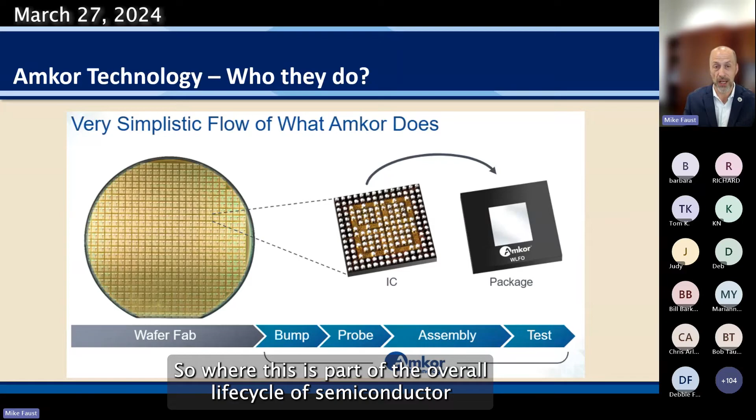Those are very, very different processes. What actually happens in the Amkor process: their base product is that wafer with all those small little chips. They're going to cut those chips off, then do a series of subsequent processes where they package and assemble semiconductors and microelectronics, conduct that assembly process, and then ultimate testing. So this is part of the overall life cycle of a semiconductor manufacturing process, but it is very, very different than the wafer fabs that are Intel and TSMC.

So that gives you some context of where this is. The property is located off of El Mirage. It's about 3/8 of a mile from any of the single family homes that are currently existing. And so that's where it's located.

We've heard a lot of folks say, well, this is displacing, or we will no longer see the planned retail. That's not an accurate statement. This is in the employment section of the 5 North at Vistancia, and I'll touch a little bit on the zoning for this particular area.

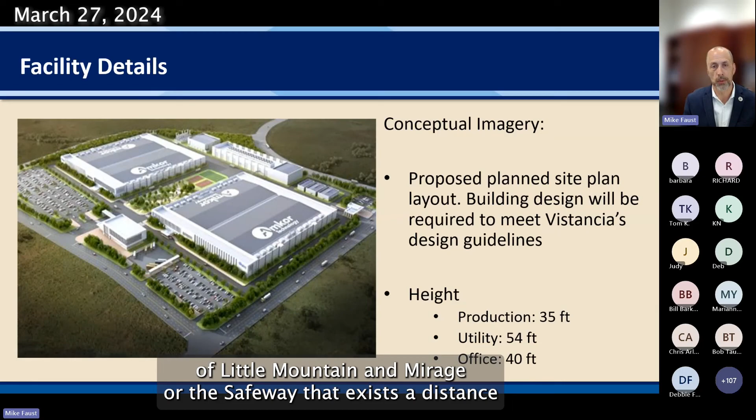To put that in perspective, the Fry's being constructed up on the corner of Lone Mountain and El Mirage, or the Safeway that exists at Vistancia and El Mirage - those buildings are about 35 feet tall. So to put it in broader context, from a height standpoint, the production building should match that look, feel, and size of those properties north and south.

I will note there is an office building located on the property that's intended to be a touch taller - that's currently projected at about 40 feet tall. And the tallest building on site is currently projected at 54 feet tall. To put that in perspective, the Vista Winds property, southwest corner of Vistancia and El Mirage, that building is 60 feet tall. So just to give some point of comparison, you've got buildings out there that are taller than these ones, and these ones are designed to fit the look and feel of the community.

So we've got a couple other questions. Will the landscape fit the look and feel of the area? And the answer to that is yes. The same landscape planning and approvals have to go through the Vistancia Design Committee.

We've had some questions about what type of additional outreach or communication there will be with this project. Specifically, the site plan review process requires public outreach. So as the site plan comes in and it's being reviewed, there is a public notification that goes out to inform people so we can share with you where we are in the process, but more importantly, what the latest look and feel of the buildings are and what that site looks like.

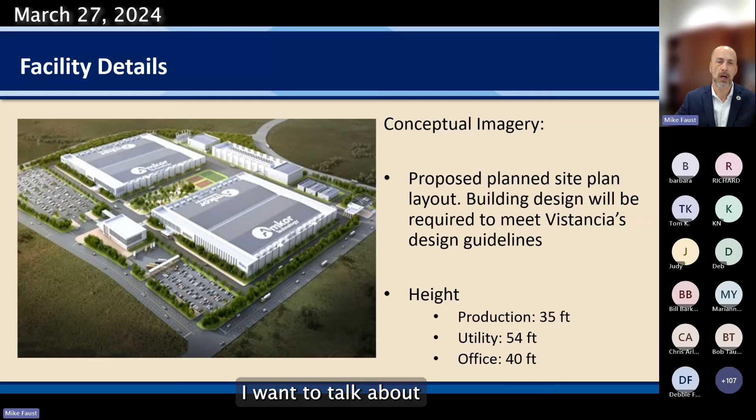I want to shift now from the site. So we talked about where the building is, to a little more detail on the site. I want to talk about some of the environmental and utility questions that we've received.

There have been a handful of questions, and I can tell you, having worked intimately on this project for the better part of 8 months, a lot of energy and effort has gone into this aspect of the project because of the importance of environmental concerns and water security.

First and foremost, I'll highlight that this facility, by our agreement, must run on reclaimed wastewater. That means water that comes through the sewer is treated at the wastewater treatment plant, then put out as reclaimed water, which is non-drinkable, and will be utilized for this production. That is a very wise use of that water resource.

Secondly, we've gotten some questions around the water demands. The facility will utilize, in each phase of the project, 200,000 net gallons per day. I want to be specific about what that means. For each phase, it will utilize 1 million gallons of water per day, which sounds significant, and it is.

The key to that, though, is we get 80% return from the facility, and that 80% is then cleaned and put back into the recycled loop. So when you have 1 million gallons going into production, with 80% returned, cleaned, and put back into the system, you have a net effect of 200,000 gallons a day.

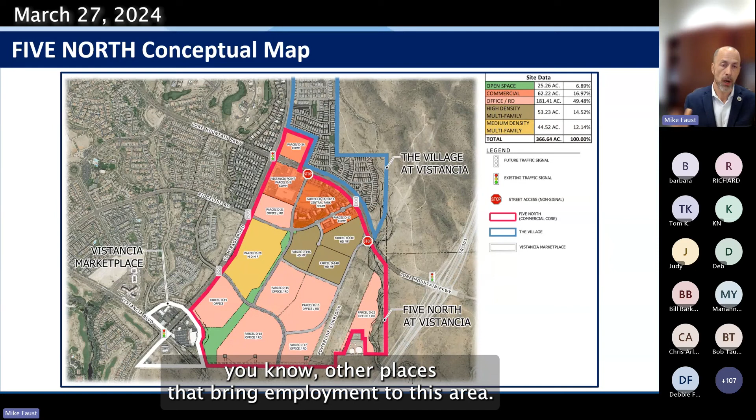You'll notice there's some peach color directly below that - that's intended for employment use as well, office and other places that bring employment to this area. As we move north into the project site, you see the three brown square parcels. Those are multifamily units, planned to be the apartments that you heard so much about last summer, and that's where they'll be located.

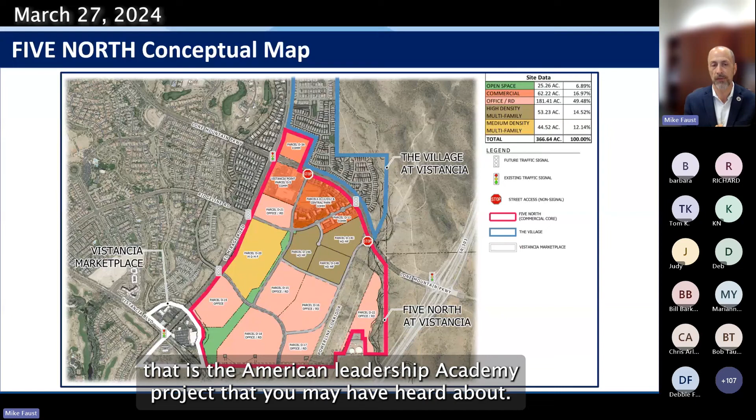If we transition west into the yellow area, this is also multifamily, but less dense, meaning fewer units per acre than in the brown. If you transition south of the yellow into the other peach and green, that is the American Leadership Academy project you may have heard about - a public charter K through 12, which I'll highlight in a few minutes on another slide.

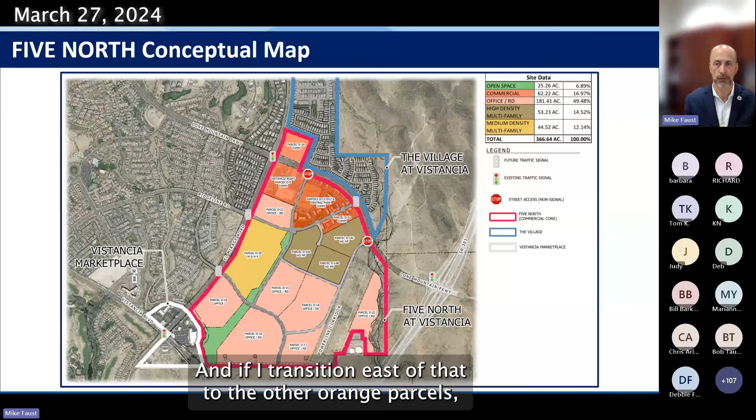As we move to the north end of the project site, you see the orange. In the left corner, the hard corner of El Mirage and Lone Mountain Parkway, is the Fry's Shopping Center currently being constructed. Transitioning east of that to the other orange parcels is the upscale amenity area that so many people have expressed desire for.

So highlight a couple of things. The first and most important thing is that the Amkor project site, if anything, enables and helps this come to fruition. It doesn't prohibit it.

I've seen communication, I've seen questions that say, now we're not getting what we were promised as a community. In all reality, the Amkor project and employment centers at 5 North at Vistancia help enable the restaurants to come, because what we see in the restaurant business is that one meal alone is not enough to open a business. They really have to have lunch and dinner, breakfast and lunch. They need to be able to get 2 or 3 turns on those tables in order to make enough revenue to make those businesses successful.

So we see this employment play in the 5 North at Vistancia as an enabler to help this happen.

Now, some folks have said, hey, could you share with us the names and the timing? And the answer is not yet. I just had a conversation with the developer the other day. The project is still intended to move forward. They're working diligently to make it happen, they're excited to deliver the vision in which they've constructed it. It's a fantastic vision. The city is looking for opportunities on how we can come in and help partner and enable it to make it happen sooner. But for where they are right now, it's premature for them to communicate any specifics or give an exact timeline. But we're hopeful that happens sooner rather than later, and bringing the density through employment and the multifamily apartments is just part of activating and making that happen.

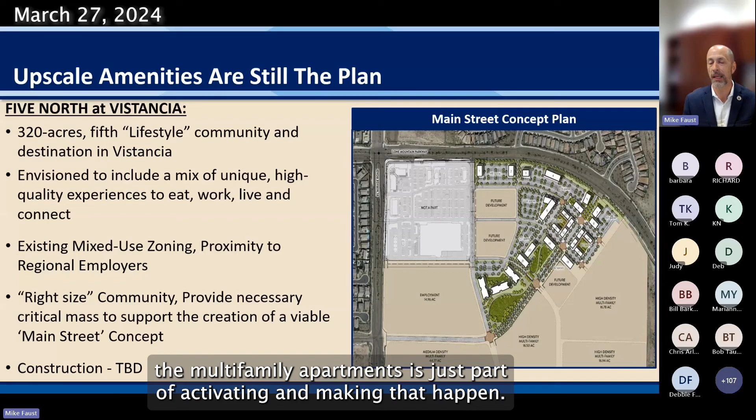I want to touch on briefly, because a lot of folks have asked questions about the American Leadership Academy. Where the high-end retail is located on the north end of 5 North of Vistancia, American Leadership Academy is located in the southwest corner of that.

I want to start with just a couple of questions that we've gotten, and I'm not going to go into full detail on the full execution of this project. I think it would be great to come back and maybe do another one of these specifically on this project, because I think it's such a fantastic thing. But I want to touch on a couple of key components.

The first of which, because there's some confusion about the city's role with planning schools: at the end of the day, the city really doesn't have a role to play inside of the broader unified school district and their construction and operation of schools. In this particular area, it's Peoria Unified School District that has that responsibility. But we want to be good partners in that. We want to continue to bring forth projects and solutions to help them, whether that's planning for land or just helping those projects advance.

This particular parcel of land was always contemplated for a school. Although the original intention and hope was a Peoria Unified School District high school, for a multitude of reasons that we won't get into here, that just hasn't happened. So we were excited when American Leadership Academy came to the table with a public charter school, a K through 12 option for offering families of Vistancia an alternative. They're targeting 2,400 students there, with 1,200 of those in the high school.

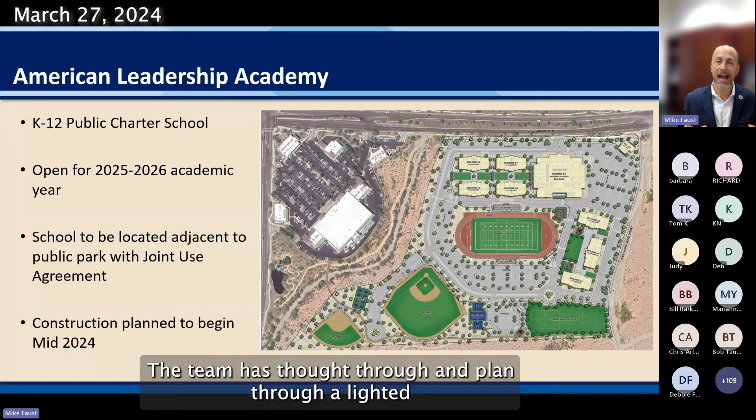I'll touch on all of this in a later slide. The goal is to stagger this: the school would be done in summer of '25, the park would be done in summer of '26. The team has also planned a lighted pickleball court built into the concept. We don't have the construction timeline for that yet, but it is built in. So we're bringing new amenities to the community through this special use park.

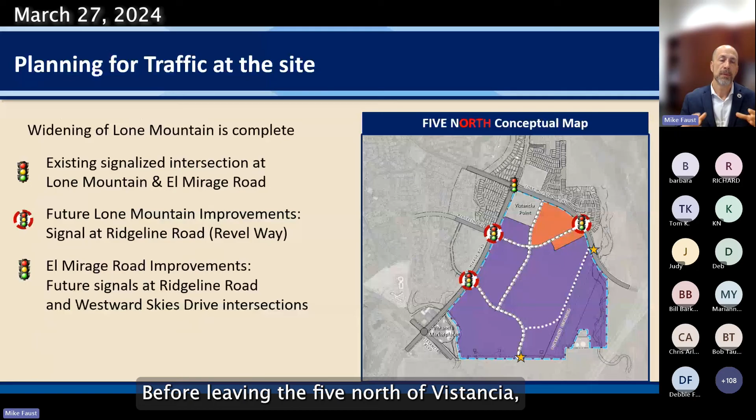Before leaving the 5 North at Vistancia, I wanted to touch on traffic, because a handful of people have asked questions about traffic planning and what we've done to think about it. So I'm going to touch on traffic as it relates to 5 North, and then in the next slide I'll zoom out and discuss traffic from the broader Northwest Peoria area. First, let's touch on this.

Each of these dotted lines is a conceptual alignment for a roadway. Now it's more than conceptual—these plans have all been submitted to the city, the majority are already approved, and now the developer is working on the construction timeline.

Before I get into all the roadways, I'll touch on the first one. If you look at the southwest corner on El Mirage, you see two stoplights with red circles around them. Those circles indicate a planned signal that's not yet constructed. In conjunction with construction of the ALA campus, you'll have what's called Westward Skies, the road just north of the K through 12. That signal is currently being designed and will be constructed and in operation prior to the school opening.

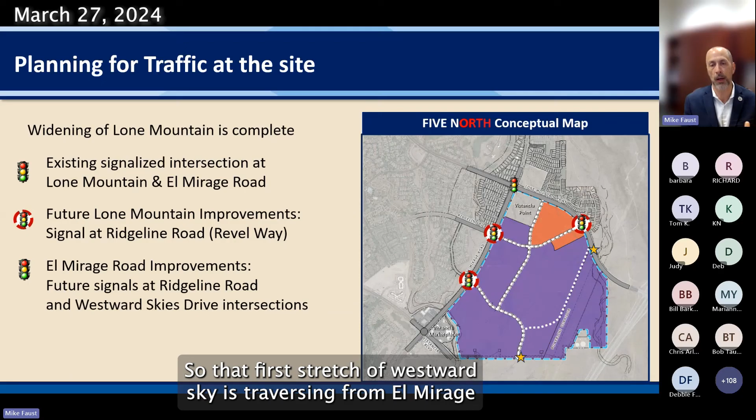The team's been working diligently to make sure this happens—it's critical, and we're watching it closely. That first stretch of Westward Skies, traversing from El Mirage east, will be constructed along with the high school. The rest of the roadways will come online as the projects build out. As Amkor builds out, its roadway system will be built, and as other pieces of property build out, those roadways will be built as well.

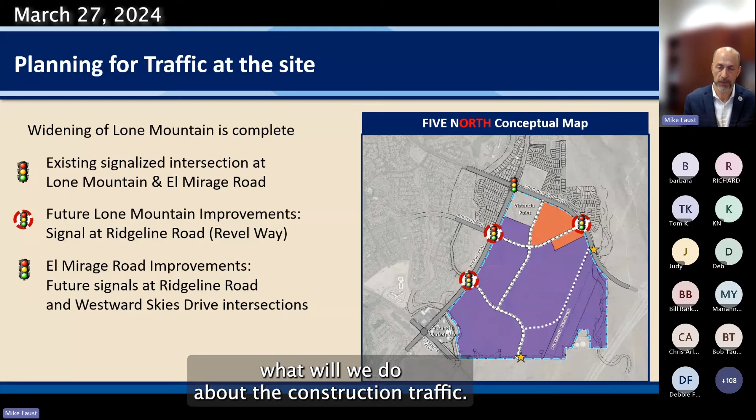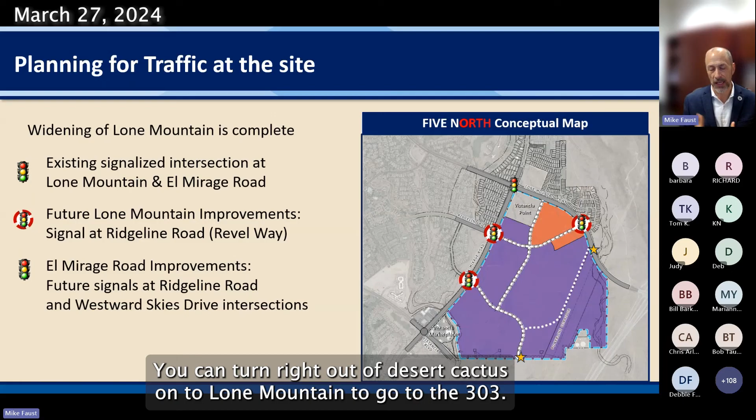Before I touch on traffic generated by Amkor, I want to address construction traffic, since we've gotten a lot of questions about that. There are two yellow stars on this exhibit. The one on the north end, the roadway attaching to Lone Mountain, is called Desert Cactus. That road is planned to be the primary source of construction traffic. It's currently built out for three-quarter access, meaning you can turn right off Lone Mountain into the property, turn left off Lone Mountain onto the property, and turn right out of Desert Cactus onto Lone Mountain to reach the 303.

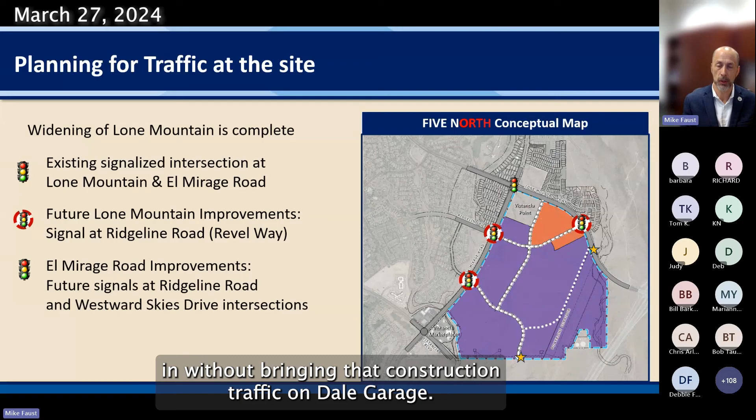We see this as the best and most viable pathway to bring construction traffic in without putting it onto El Mirage. There's a lot of planning that has to go into that, and I'm not saying there will never be any construction traffic on El Mirage, but a lot of thought is being put into moving traffic in the area without burdening the community.

Second, the star at the bottom of the image: Westward Skies is planned to go from El Mirage past the K through 12, wrap around, and turn south. Right where that star exists, due south of it is Arizona State Land. We've approached the State Land Trust and State Land Department asking permission to construct that road early—a connection off Vistancia Boulevard into this site. We believe that returns value to their property.

That sits due south of 5 North at Vistancia. But we believe that also returns value for this overall project site by directing traffic away from the Vistancia El Mirage interchange and allowing people to get to 5 North without having to go through that intersection.

Again, those are the plans, those are the discussions. I've learned a lot since being at the city, and one of the things I've learned is the amount of attention to detail and planning that goes into our transit system. We have thought through and contemplated roads decades into the future, but when it's time to construct, it does take several years to conceptually lay it out, to buy the property, to then construct. A lot of work remains to be done, but we're hopeful we can find alignment with Arizona State Land to construct that road early.

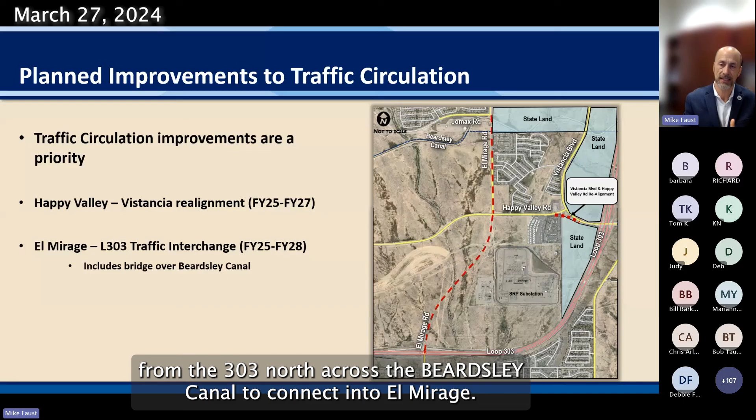I want to highlight two very specific projects for you. The first project is the El Mirage Traffic Interchange from the 303 north across the Beardsley Canal to connect into El Mirage that currently dead ends at the Jomax alignment. I'm excited to announce that ADOT did a kickoff for the design concept report for that project just this week. The city hosted it here on site. This road is very important for two primary reasons.

Number one, it adds a third access point to the community because we have Lone Mountain, which is an access point. We actually have, it'll be a fourth. We've got Lone Mountain, we've got Jomax, we've got Happy Valley that transitions in, but then bringing in El Mirage offers a fourth entryway into the community. So that's huge from that standpoint.

Number two, it provides a lending hand to Surprise because we find people have to traverse through our city to get to the northern parts of Surprise, and building out El Mirage allows people to exit the 303, get to Happy Valley Road and transition west into Surprise without clogging up the Vistancia Happy Valley intersection.

It is important to note where we have launched the design concept report for this. This is a federally funded project. It is a big project. It will take time, but the fact that it is started and it is no longer conjecture, it is actual forward action, is a very positive thing.

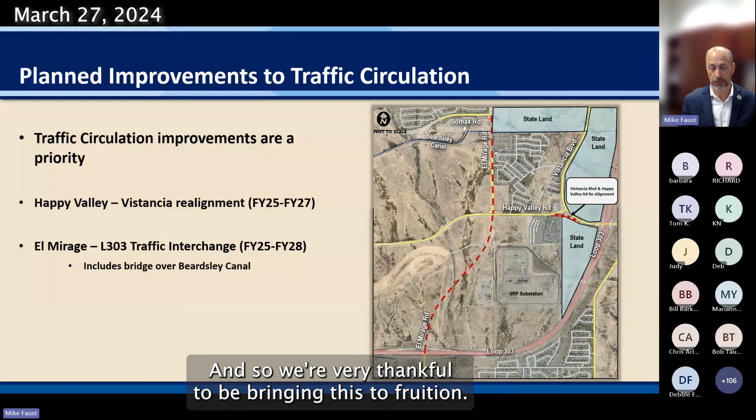We just talked to them as early as Monday about building temporary roadway to allow through traffic while we reconstruct the intersection. A lot of details to go there, but we're very excited about this project. A lot of forethought, a lot of planning has gone into it. We're very thankful to be bringing this to fruition.

I just want to step out one last time before we end our time together and talk about next steps. From a macro level schedule standpoint, we've touched on each of these, but I'll just drill them back home.

July 2024, we're expecting the American Leadership Academy to break ground, so construction will get started in the area. We expect the roadway north of it and the signal will get constructed. So by June of 25, when that opens for an August 25 launch of the school year, that roadway, that signal, that campus is all in place.

Looking forward a few months from there, September of 2025 is where Amkor, by their agreements with us, must break ground. They can always break ground sooner, but at the end of the day, they have to break ground by September of 2025. That's where it lays in the schedule.

I mentioned earlier that the joint use public park and all the amenities are slated to launch a year after this school opens, so we think August 2026 is that timeline. There might be some movement in these dates, but based on what we know today, this is the most reasonable completion date.

So with Amkor breaking ground in 25 and the park finishing in 26, we see Amkor construction taking roughly 2 years to complete, wrapping up in 2027. Now, I did miss a key point, and I don't want to skip over it, which is traffic.

There were some questions about traffic generated by Amkor, and I don't want to leave without driving home the point. We have analyzed this in some detail, including questions about commercial truck movements, and given how small semiconductors are, we've talked to Amkor about this, and they're forecasting just 2 trucks in the morning and just 2 trucks in the afternoon. So that commercial truck traffic is quite low.

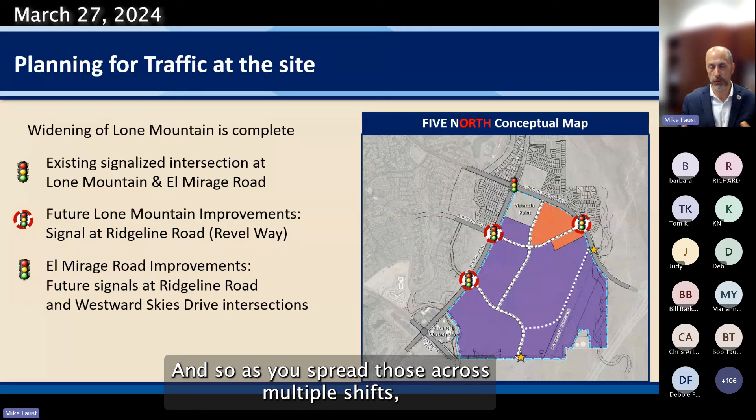Additionally, when they come online for their project, they'll only have about 300 to 350 employees at initial launch. As you spread those across multiple shifts, that traffic demand in the area is not intended to be significant. The developer will be updating their traffic impact analysis throughout this project as these various aspects of 5 North of Vistancia come online.

So we'll know more, and we'll build out the roads to make sure they're capable of handling the demands. It's important to know that we've thought through these details and we know the roads. It's just a matter of timing of when they come online.

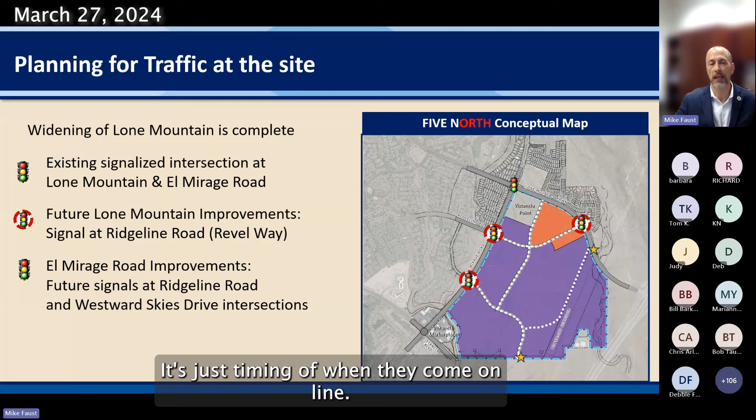Sorry, I didn't want to miss that point, but as Amkor comes online in 2027, we've planned through each of these steps. And lastly, if there's a second phase of Amkor construction, they have to be constructed by 2034, another 7 years out from the phase 1 launch.

As we bring our time to close, I want to thank you for participating. It's a lot to take time out of your day, and I appreciate the opportunity to share what city staff have been working on and what the developer at Vistancia has been working on, which is a very favorable project for our community. I don't expect everyone to agree, but I hope people are leaving this conversation with a sense that a lot of thought and detailed planning, oversight and checks have gone into making sure these things happen.